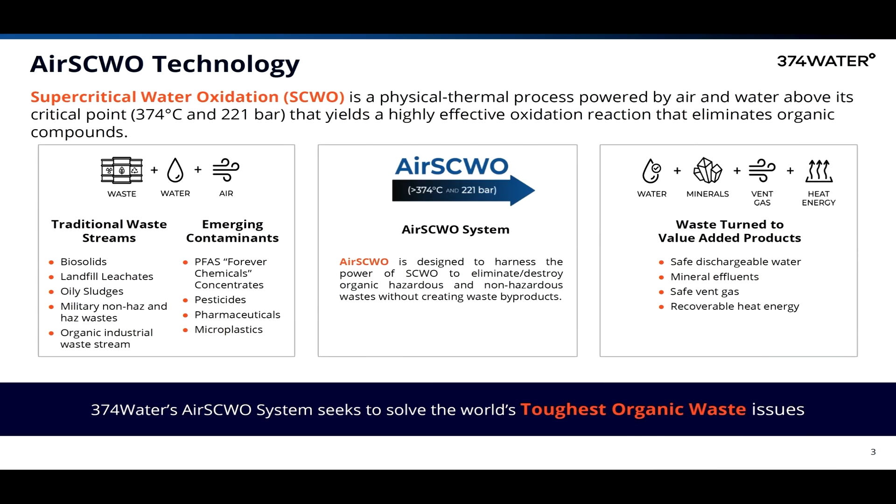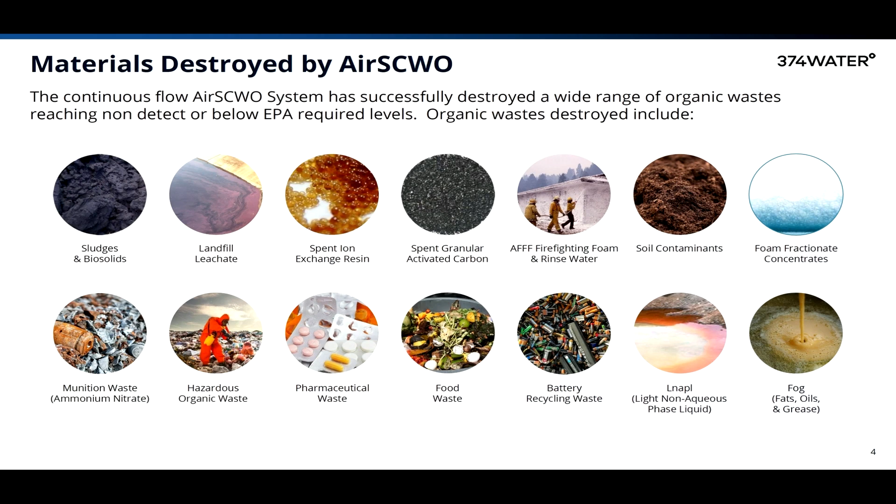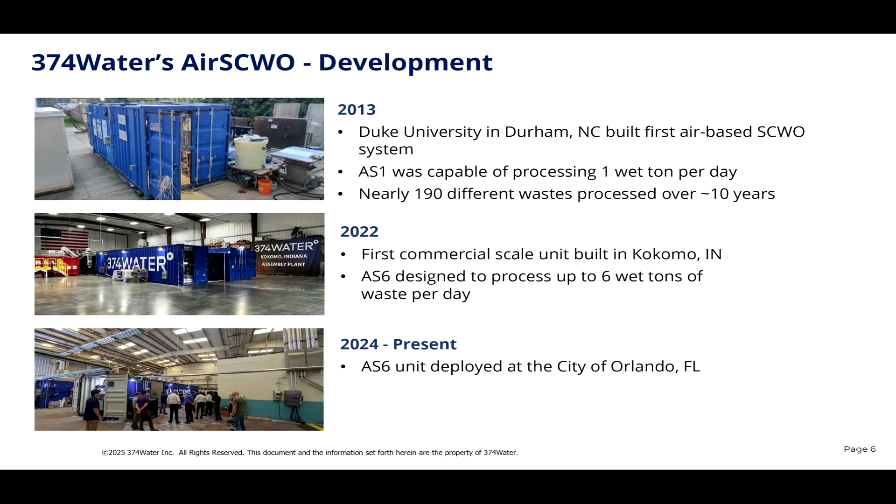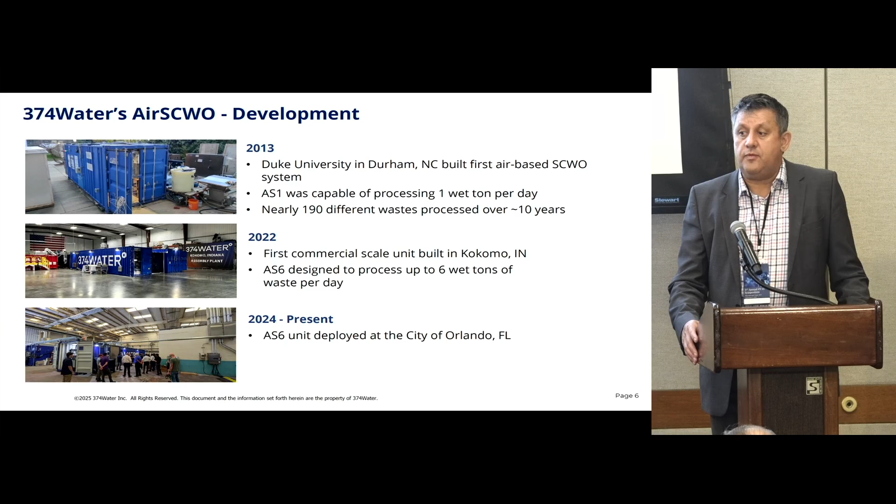So here's where I wanted to highlight the Orlando project that I had started to mention. This again is with their wastewater treatment facilities, one of their locations. What they're looking at is a treatment solution not just for one location, but to expand, because they're currently taking their biosludge—it's being land applied in many cases, or sent for incineration. So what they're looking at is a full treatment solution that eliminates their cost of land application, and in the future limits their liability related to PFAS and other potential issues from that process.

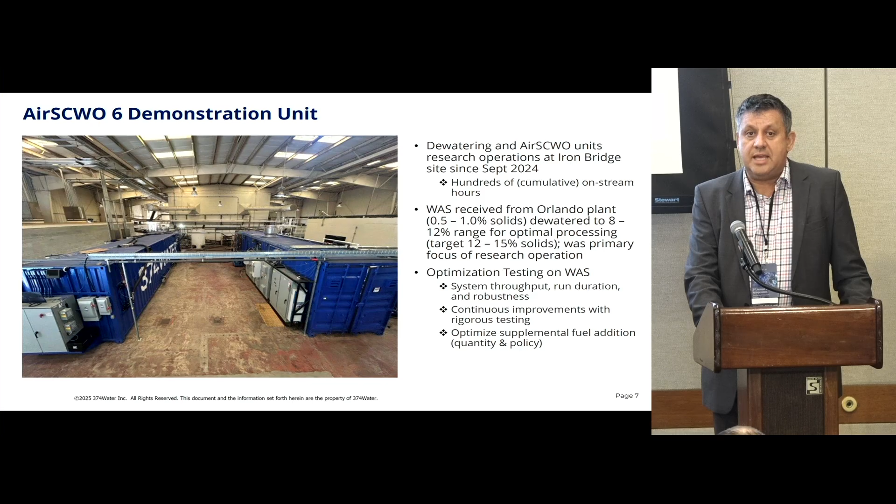So this is a picture of our installation within their facility, and we're taking in that biosludge, putting it into a slurry state, and then running it through our process.

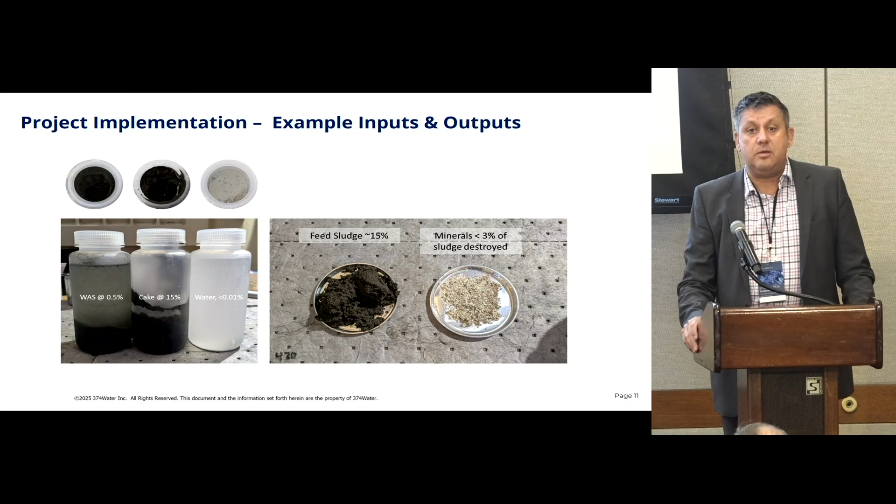And here's where I wanted to highlight the ins and the outs. On the left side there, you see the wastewater concentration coming in—not something you can just put anywhere. On the right side, you see the water output once it's gone through. The waste has been eliminated from that feed sludge, which is at approximately 15% waste, and what's coming out is clean water and the mineral effluents that you see on the right.

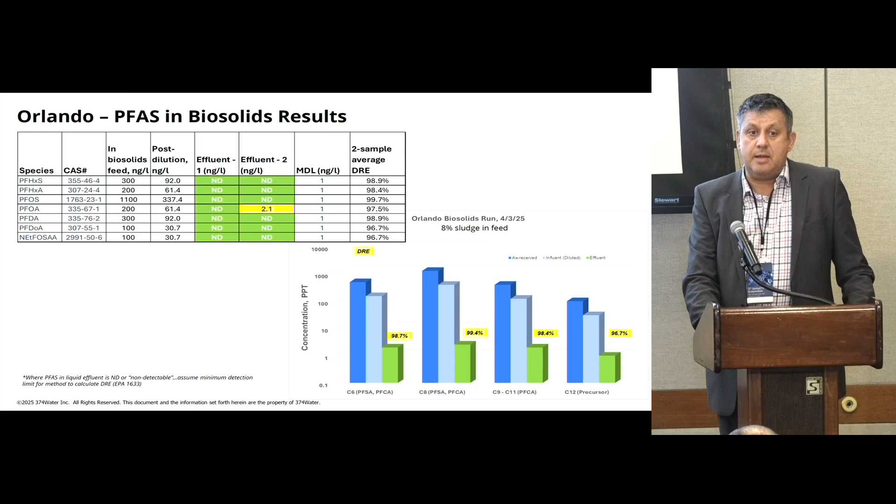So the efficiency, or the process itself, eliminates 99+% of the PFAS within the waste streams. We've been able to do that on a consistent basis across this process with Orlando, demonstrating that process with them, as well as with the project we're currently working on with Orange County Sanitation, in which we expect to deliver our machine out there this fall related to that project.

Some additional examples of the efficiency of the PFAS treatment.

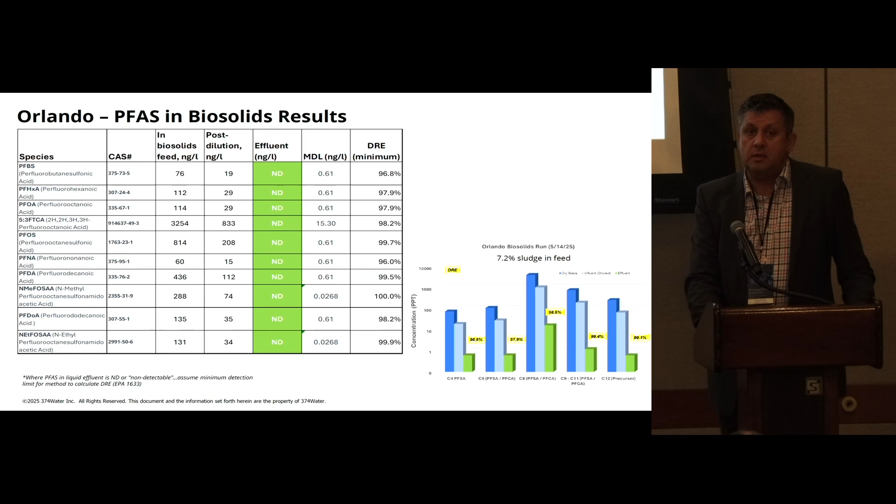And now I just want to go back and talk a little bit more about 374Water business. We've had a very busy year, and I don't think it's attributable just to me joining in December—one of the exciting things and reasons I joined was the great business potential that the technology and the company has, and the big potential that we're seeing.

As I mentioned, we did receive an award from North Carolina for the treatment of AFFF. We're expecting to deliver our Orlando and our OC San projects. We're also currently working with the Department of Defense on a project in Detroit that we're a little over halfway through, where we will demonstrate the efficiency of SCWO to treat 6 different waste streams. What we expect is that we will receive the golden ticket from the Department of Defense of having an approved vendor and approved technology based upon our efficiency in treating those waste streams.

We know that the Department of Defense is looking at the risk that they have and the issues they have on their bases and other locations, both within the United States and elsewhere, of waste contamination and how that will be treated. So we believe that upon completion of this project in Detroit, that will open up an additional revenue stream and additional possibility for the business in order to be able to directly gain or win bids with the Department of Defense related to their ongoing cleanup efforts.

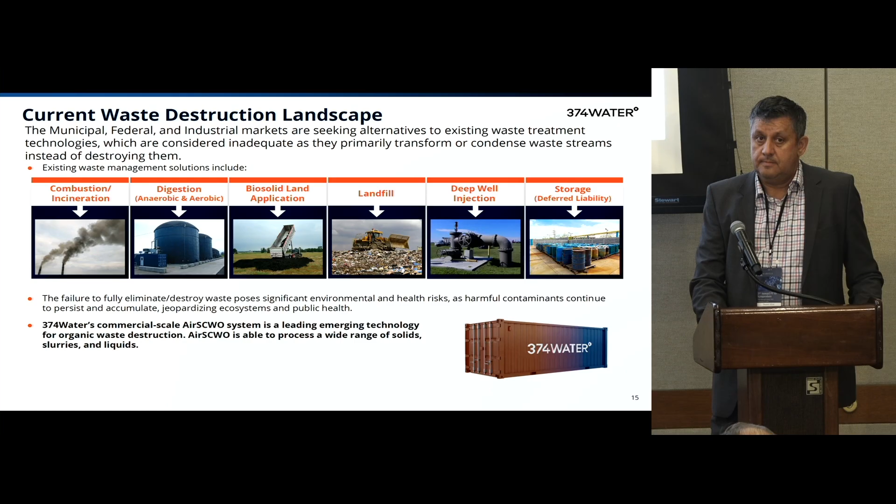So we look at the waste treatment as a $450 billion global issue. As a company, we are currently focused on North America, but we all know that waste is a global issue. We are currently focused on delivering on our North American projects, and going forward we expect to expand internationally as our technology has applications on a worldwide basis.

I just want to start with the municipalities. I mentioned previously the projects we're working on related to biosolids, and we see this as a large opportunity across the United States, given the sheer number of wastewater treatment facilities and the municipality requirements to address that waste. We were speaking with the head of the Orlando wastewater treatment just in the last couple of weeks, and he said, jokingly, he knows in his business he's never going to run out of demand, because it's 24/7, 365 days a year.

So we're working with them to address this as an alternative treatment solution, that reduces their need to transport, landfill, or land apply the waste, because you're truly treating it and addressing that waste stream there.

Importantly, also, is the federal opportunity that we see with the Department of Defense and other government entities, looking at whether that's AFFF or other types of waste from a government standpoint, and how that gets addressed. This is another important area that we see as a requirement for those entities to address. And as was mentioned earlier, there are funds being designated from some of these settlements, specifically for the cleanup and the opportunity that we see there.

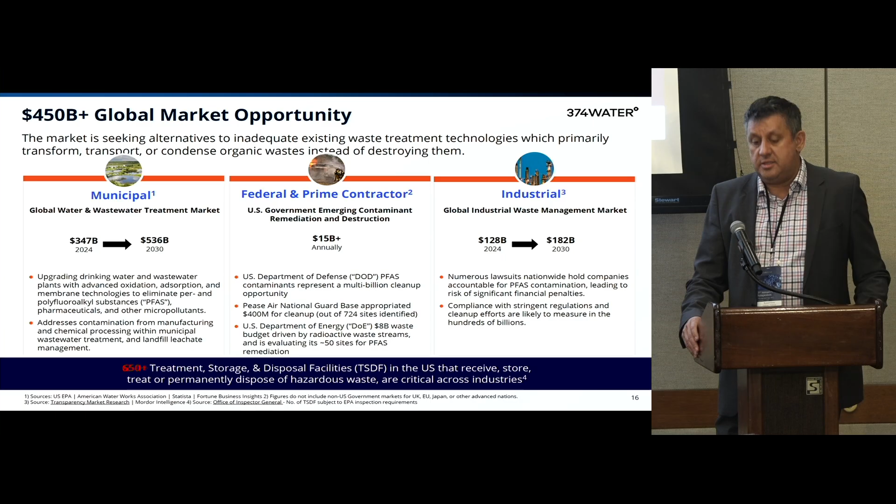So within our pipeline, we look at it as we currently have about a $1.8 billion pipeline. I wish that was all contracted revenue, but that's our pipeline.

Currently this year, we're projecting that we're going to do between $4 and $6 million of revenue, and that's dependent upon the timing of a couple potential deals happening within this year.

For the first 6 months, we had approximately $1.1 million of revenue, versus last year we were a little over $400,000. The bulk of the revenue we recognized so far this year was related to the completion of certain demonstrations earlier in the year, as well as progress billings on the projects we expect to continue to deliver this year.

And that's how we expect to go from the $1.1 million to $4 million plus, again depending upon the timing of a couple other potential deals.

When we look at that overall demand of the $1.8 billion in our pipeline, we look at it within those business areas, starting with municipalities. We expect that for the projects we have to date with Orlando and OC San, upon their successful completion, they will be placing additional orders and moving to the next phase within those projects, as well as with other municipalities we're currently talking with for projects we can build upon.

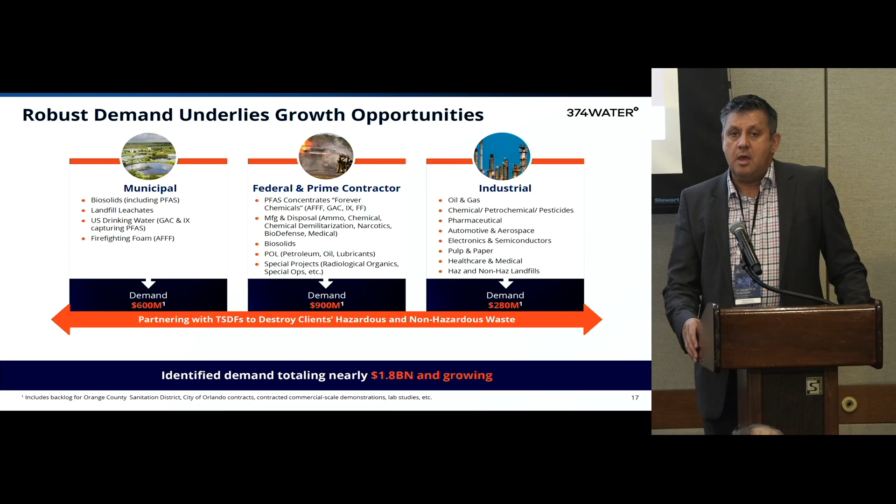And really the biggest opportunity that we have, in the discussions we've had ongoing, is with the federal government, particularly the Department of Defense, related to their ongoing cleanup needs. We currently have several outstanding proposals, and we expect that as we go forward with that golden ticket, it will help open additional doors for the business and for the application of our technology.

This is a snapshot of our current operations and current deployments. We are based, our company came out of a Duke research project, and we continue to maintain a lab in North Carolina where we do ongoing research and demonstrations. Our current manufacturing location is based in Orlando, as a partnership with the Iron Bridge Wastewater Treatment Facility.

As I mentioned, we currently have a project ongoing right now in Detroit. We did a project earlier this year in Colorado at the Peterson Space Force Base with our mobile unit, and I'll show the different sizes we have of our AS units. In California, we're expecting to roll out the project and delivery this year related to the Orange County Sanitation Project.

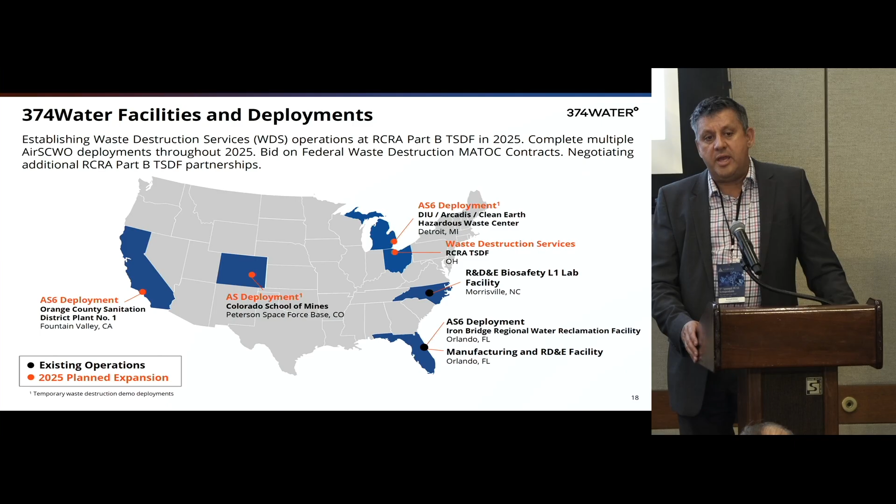Just last week we made an announcement that we've signed our first agreement with Crystal Clean, that we will bring our technology to their Oregon, Ohio location, where we will be launching our waste destruction services. I'll be talking more about that.

Here's the different sizes of our units. Our first size, the AS1 - the 1 in the numbers is our expected output on a daily basis - is a mobile unit, completely able to go on site and treat waste there. Our AS6 is what we're currently utilizing both in Orlando and in our Detroit demonstration. That unit is also transportable, modular, and able to move around.

What we expect, and what we're in development on, is our AS30, which we expect to go into production next year - a larger size unit that will be completely modular. At that volume it will be much more attractive both from a municipal and, we expect, an industrial standpoint, given the volume it will be able to process on a daily basis.

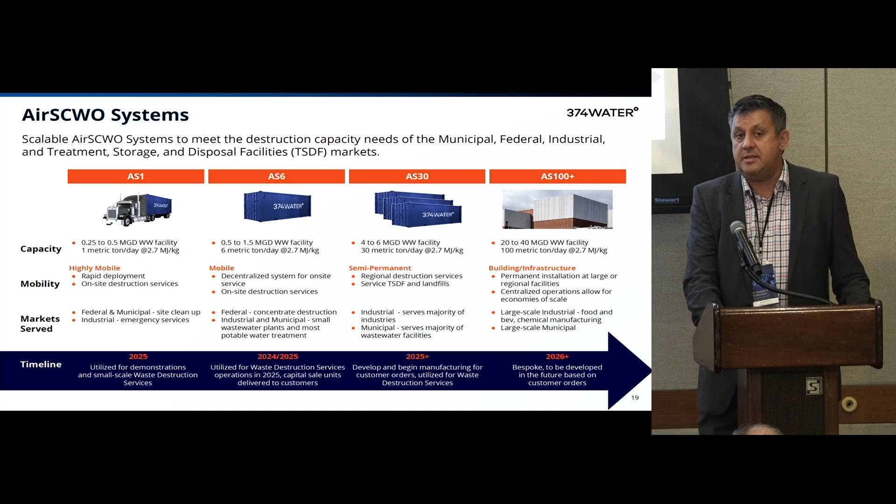On our go-to-market strategy, we expect to continue to build on our capital sales to date, as well as the launch of our waste destruction services, to address customers' needs - whether they want to own it themselves, possibly have us operate it, or in the waste destruction services, bring waste to us and we process it and provide them with a certificate of destruction.

We believe waste destruction services will be an important opportunity for the business to have recurring revenue and to expand our footprint. Our plan is to launch over the next couple years and have multiple geographic locations that will address waste treatment for customers, as well as having AS1 units we can bring on site on a mobile basis, or even AS6 units, in order to address waste streams at a customer's location.

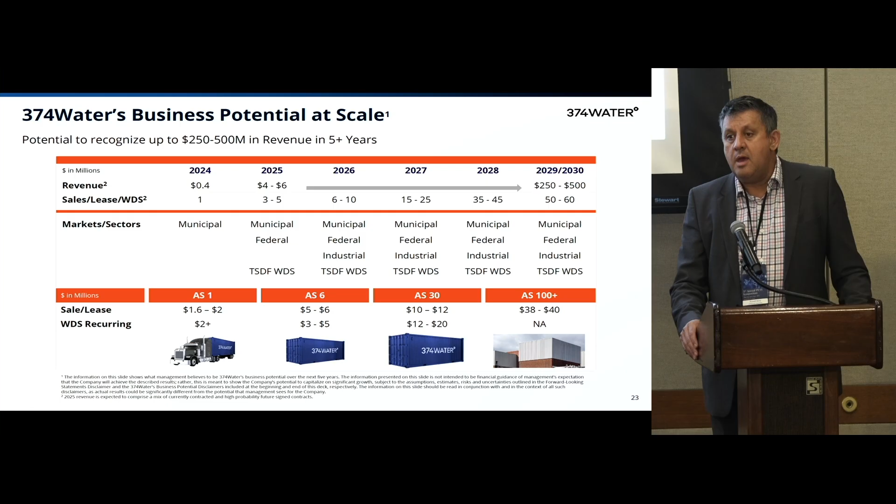We see our focus this year and into next year as being domestic, North America, but we continue to have discussions with possible opportunities in Europe and Asia, because we see waste as a global issue and SCWO as a global solution for that waste issue.

So again, where we are today with 374Water is really growing the business, delivering the technology on a scalable basis, and being able to apply it to the waste treatment needs from a federal, municipal, and industrial business standpoint. We're excited about where we are today with the delivery of those projects and the opportunities we have going forward.